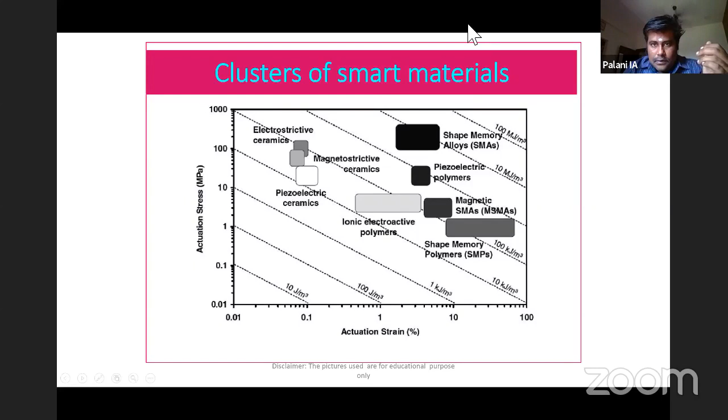If you try to look at the overall picture, one minute. Okay, I'm stopping my video so you can see my screen in a much better way. As far as these smart materials are concerned, these are the complete class of smart materials available.

As far as smart material selection is concerned, two major parameters we need to consider: one is actuation stress, another is actuation strain. These will be the main parameters helpful for deciding smart materials for applications—for example, like how you decide a motor for your application, either by torque or by speed. Similarly, with respect to stress or strain, you can select the type of material.

In the current context, I will be discussing shape memory alloys, SMAs, in detail. Let me go into a brief overview of how a shape memory alloy works.

You can see a video on my screen. In this video, you find a lotus flower kind of structure blossoming. It is blossoming because I am supplying hot air to it. When I supply hot air, it blossoms, and when I cut off the hot air, it automatically comes back.

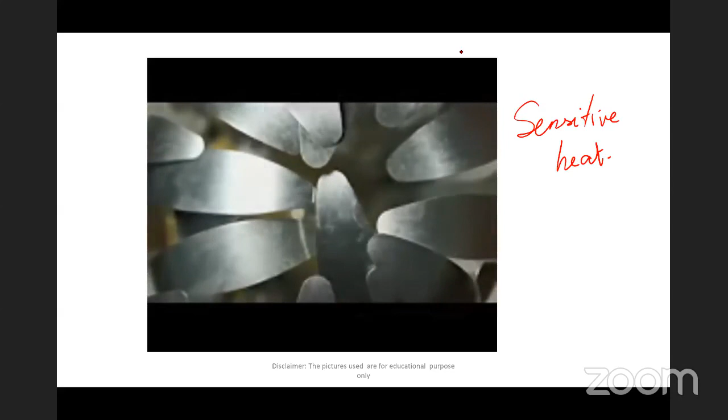So basically, this material is sensitive to heat. In the meantime, these materials have a capability to respond to heat, and they have a capability of biomimicking in nature. So that is one interesting aspect with this shape memory alloy. You can train this material for any kind of biomimicking capability.

As far as the history of the shape memory alloy is concerned, it is normally coined with the trade name Nitinol, that is Nickel Titanium Naval Ordnance Laboratory. That is why we call it Nitinol. Commercially, when you want to buy the shape memory alloys, it is already termed as Nitinol.

As far as the mechanism behind this memory is concerned, let us consider I have an ice. I'm just heating this ice, I get it in the form of liquid, and then further heating it, you get a gaseous phase. In other terms, this is something like a phase transformation. With respect to this phase transformation, you are achieving the SMA characteristics.

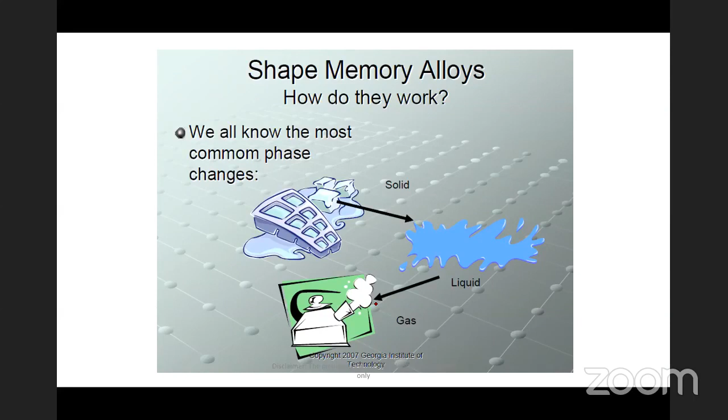Let me show you how a phase transformation happens in a shape memory alloy. As far as shape memory alloy is concerned, you have the austenite phase and you have the martensite phase. So it is something like switching between the austenite phase and the martensite phase. By heating it and appropriately loading it, you get certain amounts of variations coming out of it.

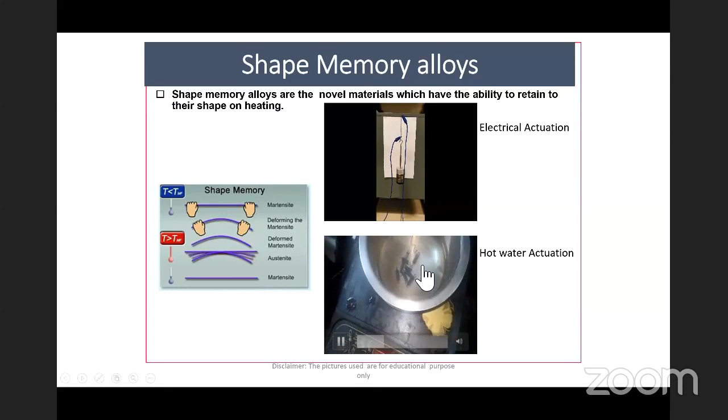Let me show you with a simple video. Here I have a shape memory alloy spring which is kept here. I am applying a load to it, and it is deforming. When I heat it, it comes back. Similarly, in the case of hot water based actuation, I have hot water here. I'm deforming the spring and putting it inside this hot water, and finally it crumbles up and forms a shape.

As far as the shape memory alloy is concerned, you have a martensite phase, and this is your deformed martensite. Now I heat it, it results in an austenite phase, and then it comes back to the martensite phase. So this is like a cycle: martensite to deformed martensite, then I heat it so it becomes the austenite phase, and from the austenite phase it comes back to the martensite phase.

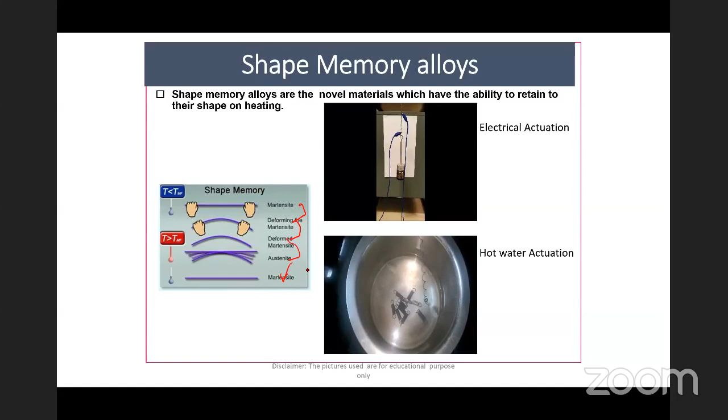Now let us go into some of its application perspectives, how these shape memory alloys are being employed. As far as shape memory alloy is concerned, what we do is train the system based on our requirement.

For example, here I have a wire which needs to be actuated like this, and when I put it in hot water, it should come to this shape. For this, I need to train it in a particular fixture, and I need to heat it in such a way that I am switching between the austenite and martensite phase, creating a cycle so that it continuously remembers its shape.

There are different kinds of materials which exhibit this shape memory alloy behavior, like NiTi, CuZnAl, CuAlNi, and there are some Fe-based SMAs which are also available which exhibit the shape memory effect.

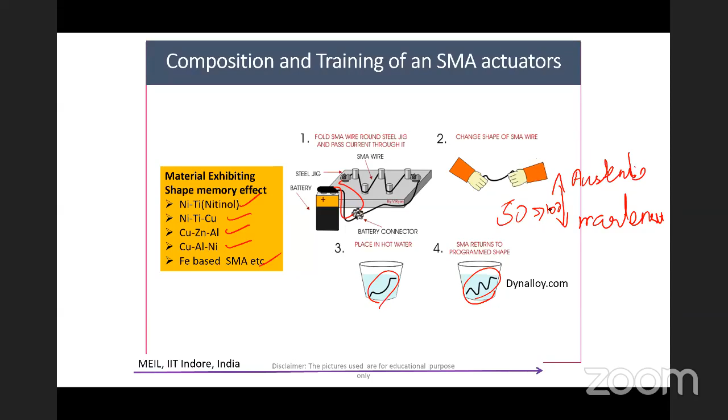Now, as far as the major challenge is concerned, for this training you need to have multiple cycles. In fact, to get such a structure, you need to train it for more than 50 to 100 times. That is, you need to heat it, then quench it in liquid nitrogen, then again heat it and quench it, and this you are supposed to do for more than 50 to 100 cycles. That is very difficult. In fact, it is time consuming as well as energy consuming.

If I try to look into the challenges in this particular field, these are some of the challenges I would like to put forward. One is tedious training, as we have seen that even for a minor change in the structure, you need to go for a tedious training.

Second is composition. Different materials exhibit different types of compositions, like NiTi, CuAl, CuAlNi, etc. By changing the composition, you can have tunability towards your functionality. That is one interesting aspect.

Third, if you see the video, there is an expansion of the spring, then again a contraction of the spring. When there is continuous expansion and contraction, there is a chance that some kind of oxide formation gets deposited on the surface. When this oxide formation gets deposited, it finally ends up in failure of the system. That is why we call it thermomechanical behavior.

In simple terms, if you are getting an LED bulb from a shop, you should be able to know the warranty and guarantee of it. Those are noted down by simulating it under a simulated condition, and from that we analyze it. Similarly, in the case of shape memory, we need a condition which shows what would be the life of this shape memory.

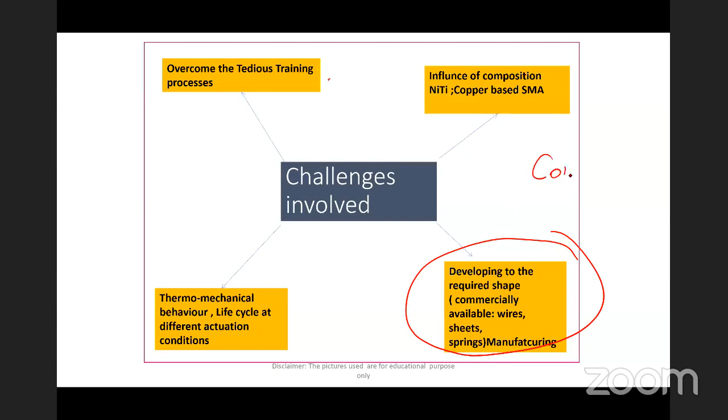Fourth important challenge: in most cases, commercially you get your shape memory alloy in the form of wire, spring, or sometimes sheets. It is very difficult to get it in a tailor-made structure. For example, if I want a tailor-made structure like this, it is not possible. This restricts things from a research or application perspective. So you need to make an arrangement such that you can make tailor-made structures. That is one of the major challenges.

These are the four challenges which we have addressed in our laboratory at different levels, which I will be explaining in my slides.

Let us start with this major challenge of making custom-made or tailor-made shape memory alloy structures. The first one I would like to talk about is something called BIMORPH, which is nothing but a thin film. We have developed thin film shape memory alloy structures, and we want to use that thin film shape memory alloy for different applications.

The motivation for us to start this work is something like a dragonfly structure you might have seen on some farms. In this dragonfly structure, the interesting thing is you have a thin polyamide sheet-like structure. This thin sheet actuates at very high frequency, initiating some kind of lifting force to the dragonfly. So if we need to design an artificial dragonfly, our major challenge is to develop such a wing-like structure.

We thought we want to develop a similar structure for some kind of micro robot. So the major challenge in this is we went for a concept called BIMORPH. BIMORPH is nothing but two layers - bi means two layers - so it's a composite layer.

For example, here I have two layers. One layer is a shape memory alloy, the other layer is a small elastic medium. So one way displacement happens because of the shape memory alloy, and the return stroke happens because of the elastic nature of it.

What I am doing is I have a polyimide sheet, and I give a strain to the polyimide sheet by applying a clamp to it. Then I go for deposition. When I deposit it, after deposition it gets a curved surface, and after heating it gets something like this.

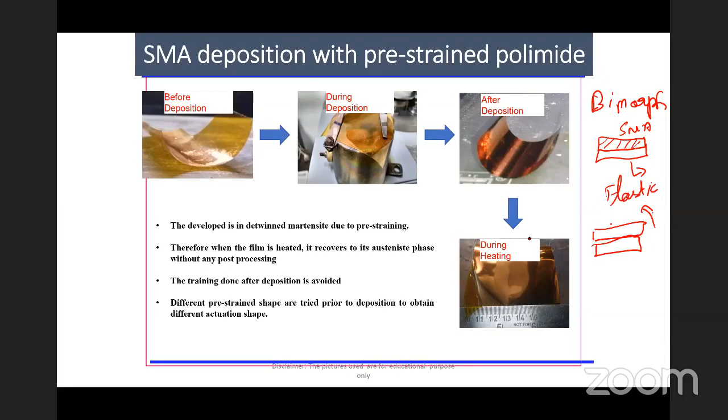The deposition method I use is a simple thermal evaporation unit. In this thermal evaporation, I have the material placed over here, kept on the boat. I am just heating this material so that there is vaporization, and here I am keeping the polyimide.

So in fact, I can just show you a small animation where you could see. So this is your SMA bimorph. As far as this SMA bimorph was there, this is on a heating phase, and when I try to remove it, it is on a cooling phase and it gets cooled. So that is the onward stroke that happens because of the stress which is being induced on the thin film, and it is happening because of the shape memory effect.

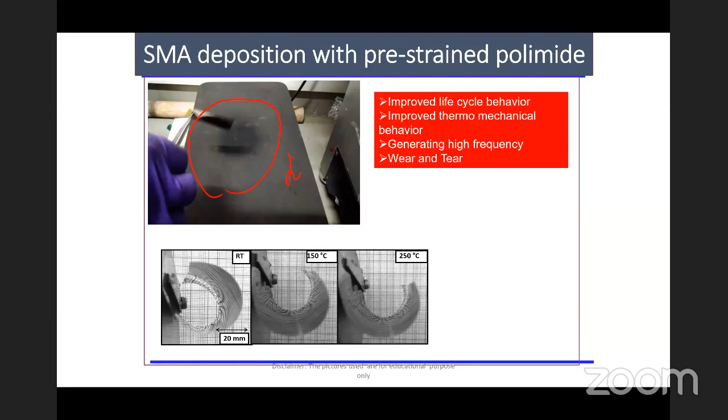And when you try to cool it, the return stroke happens because of the polyimide which is available. When you try to induce the stress on the polyimide, so that tries to come back. So this is how we have achieved the shape memory alloy bimorphs.

In fact, we have to do a certain amount of detailed research on it to improve its performance for different applications. Basically, we went for 3 different applications. 2 are relevant to energy and 1 is related to micro robots.

Okay, so as far as to investigate the energy, we were just looking into the substrate effects, the substrate thickness, and then the inclusion of intermetallics to improve its ductility. So this is some of the structural analysis which we have employed. This is a simple SEM micrograph which shows that the samples are plain.

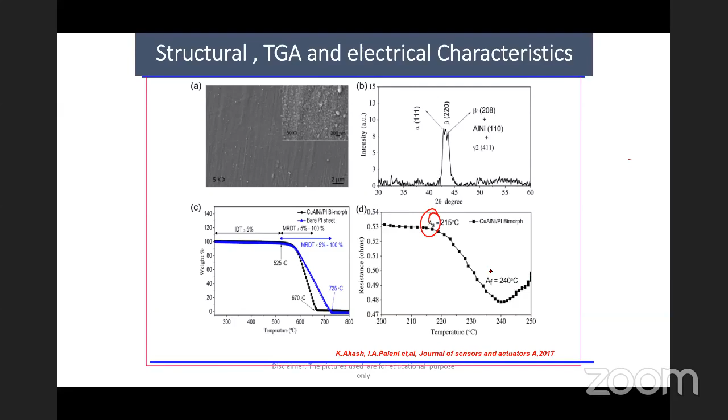In fact, we did an XRD analysis to study the particulates which are available, and we also did a small DSC and TG analysis to study the austenite and the martensite behavior of the material.

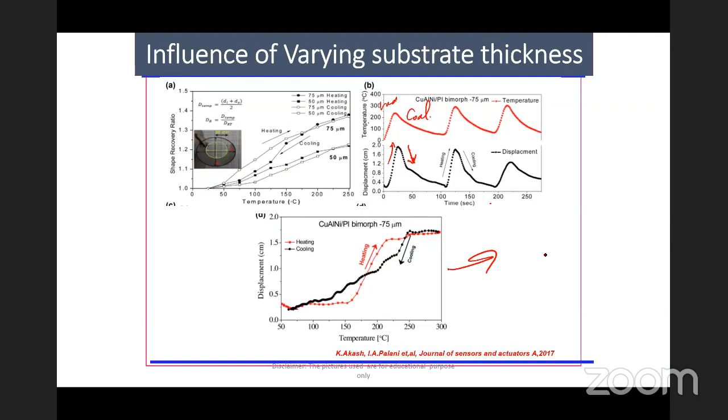So we have plotted with respect to temperature, time, and with respect to displacement and time. As far as temperature-time is concerned, this is your heating cycle and this is your cooling cycle. During your heating cycle, you get a higher displacement, and if I want to have control over your displacement, I can just cool it. And this is your hysteresis plot, which confirms the SMA for an actuator.

Okay, so in fact we did a detailed life cycle analysis. In this life cycle analysis, we went for a continuous displacement. So by changing the continuous displacement and by going for alternate heating and cooling, we can go for a higher life cycle.

In fact, our life cycle was basically relying on the substrate thickness. So we went for different substrate thicknesses, and we found that 75 micrometer polyimide will be highly helpful for us to go for more life.

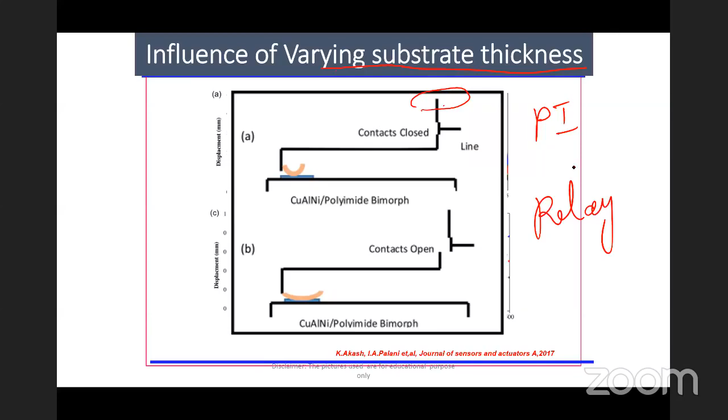Okay, so we went for some kind of contact arrangement, so that whenever you try to actuate it, the contact is closed. When you try to open it, the contact is open. So basically, we were looking for some kind of relay arrangement, a micro relay arrangement for this system.

Okay, next we also studied the influence of growth temperature. Basically, because you have a substrate, this substrate plays a major role. Like for example, in the case of thermal evaporation, this is your substrate.

This substrate which is being placed is nothing but a polyimide, and here I have a boat through which the particle is being evaporated, where you have an SMA which is being placed over here. So what happens is I'm just heating this substrate. When I heat this substrate, there is some kind of microgranule formation that will happen. This microgranule formation will enhance my wettability for depositing the SMA. Okay, so this concept is called the VLS mechanism.

That is nothing but vapor, liquid, solid mechanism - I am just heating the substrate and improving the wettability of the system. We did a thorough DSC analysis to investigate the austenite and martensite behavior, because this is going to govern the actuation characteristics and its applicability of the shape memory alloy for different applications.

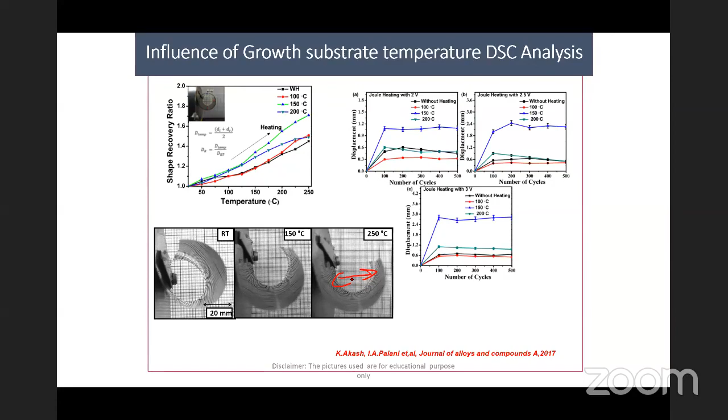We looked into the recovery ratio - how much is the recovery ratio, or how much is the curling characteristics being applied, how these curling characteristics are being employed. We went on continuous heating of the system to see up to how much life cycle the shape recovery was happening. So these are some of the life cycle behavior.

We included some of the intermetallics in it, such as Mn, etc. These intermetallics are highly helpful to improve the life cycle behavior throughout the system.

As I said earlier, this work we have used for some kind of micro robotic application. As far as this micro robotic application is concerned, one major aspect is, for example, if I want to design a dragonfly with a shape memory alloy bimorph, two major parameters which I need to consider: one is my frequency,

and the other one is my displacement. So in a localized displacement, if I have a tunability towards change in frequency, that would be helpful for me to proceed further or to use it for some kind of micro robotic application. The major thing is, whatever material we have developed should actuate at the frequency we require. In fact, it actuated, so that is the reason we went for different intermetallic compounds.

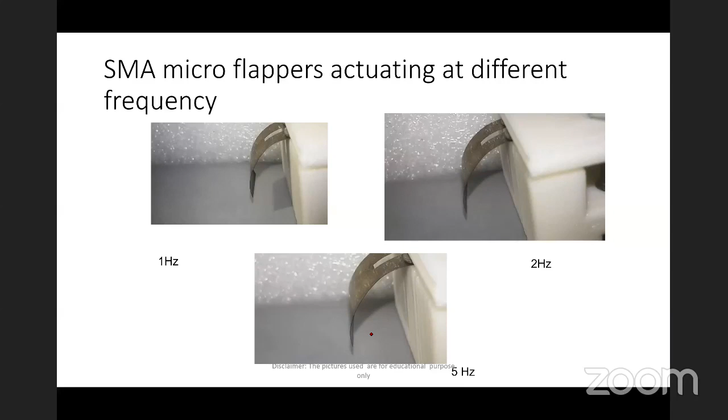Now let us go to the next one. The next application we were working on with the shape memory alloy bimorph is for transformer oil contamination detection. As far as the transformer is concerned, we all know transformer blast is one of the major issues, because you have a coil placed inside the transformer. By alternative heating and cooling of the transformer, the oil gets contaminated. When the oil gets contaminated, there is a chance that the coil heats up the oil in a much higher way, which may result in explosion.

The idea behind this is, since we have a material which is sensitive to heat, we have a bimorph. We want to put this bimorph in the transformer oil, and employ a laser displacement sensor, which is connected to an IoT module. Whenever there is a change in contamination, there is going to be a change in the influence of temperature. When there is a change in the influence of temperature, it will end up in some kind of variation, and that variation is continuously monitored using this laser displacement sensor.

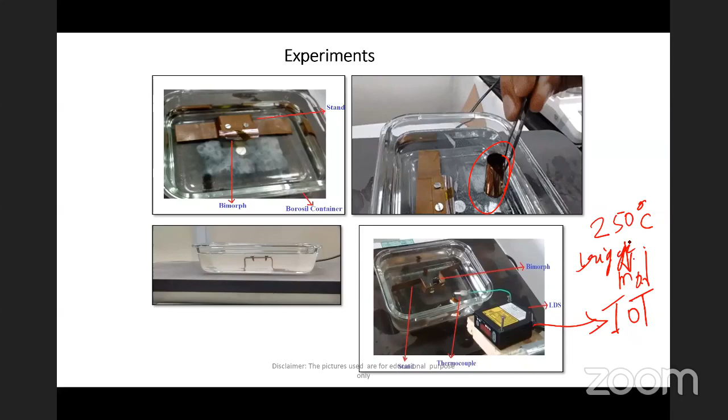When this laser displacement sensor gets actuated, we can set a limit - for example, if the temperature goes beyond 250 degrees Celsius, this IoT module will get triggered. When this IoT module gets triggered, a message can be sent to the concerned lineman, so that he can immediately look into it. We have given this to Central Power Research Institute for some technology transfer analysis. So this is how an LDS works on the system.

The next case study relevant to shape memory alloy bimorph, which I am going to discuss, is something related to a system called Johnson's heat engine. Most of you might be aware of this concept called perpetual motion. This perpetual motion is nothing but getting a continuous displacement without much effort.

So in fact, it is against the second law of thermodynamics, but still it has its own energy conservation. So the interesting part is this SMA can be used for developing such kind of perpetual motion.

Like in this case, you have a Johnson's heat engine which is available. Here you have a cold junction and here you have a hot junction. What happens is, here you have a shape memory alloy available. Because of this variation in hot and cold junction, there is a shift in the center of gravity of the wheel, which results in kind of rotation to it. In fact, if you see this video...

If you see in this video, you have a rim where shape memory alloy springs are being placed. This is hot water. Because of the change in the center of gravity, there is going to be a rotation.

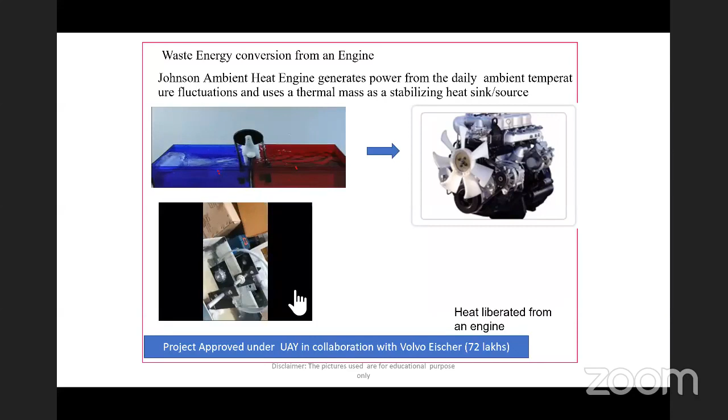So like places like Rajasthan, etc., which are high humid, you can use this as an energy harvesting unit. The only thing is, you have a shape memory alloy rim kind of arrangement, which we are going to put near an overhead tank. When it gets heated up, obviously it will rotate, and from that you can harvest the energy.

So with this as an idea, we were working with a company called Volvo, which basically deals with trucks. So in their arrangement, we wanted to go for energy harvesting application.

As we all know, when we switch on any automobile system, either car or truck, at the bonnet you can reach a temperature of around 80 to 150 degrees Celsius easily. Whereas at the exhaust, your temperature ranges around 250 to 450 degrees Celsius.

So the idea is, if we can fabricate this shape memory alloy bimorph, since already we have a bimorph, in the form of a belt, we can put this bimorph in between, either at the exhaust or at the front of the bonnet.

So as far as the range of 80 to 150 degrees Celsius, I can go for nickel titanium based shape memory alloys. And in the case of CuAl combinations, I can go from 250 to 350 degrees Celsius. So this can be used at the exhaust, and this at the bonnet, so that you can harvest the energy and continuously tap it.

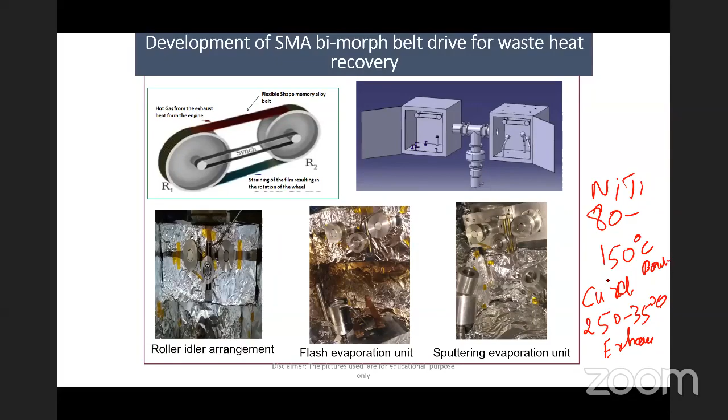In fact, we made an arrangement in such a way that we were trying to tap the heat coming out from the exhaust, which I will show you in one of the videos. So the next case study we are going to talk about is something related to the usage of shape memory alloy structures for some kind of additive manufacturing system.

So, till there, any doubts or questions from your end? Yes. Any questions or any doubts? Hello? Hello? Sir, I am getting some kind of noise. Hello?

Okay, so let us go to the next case study, which is related to NiTi shape memory alloy structures using laser additive manufacturing. As far as this case is concerned, we all know about this concept called Industry 4.0, where machine-to-machine communication is called Industry 4.0.

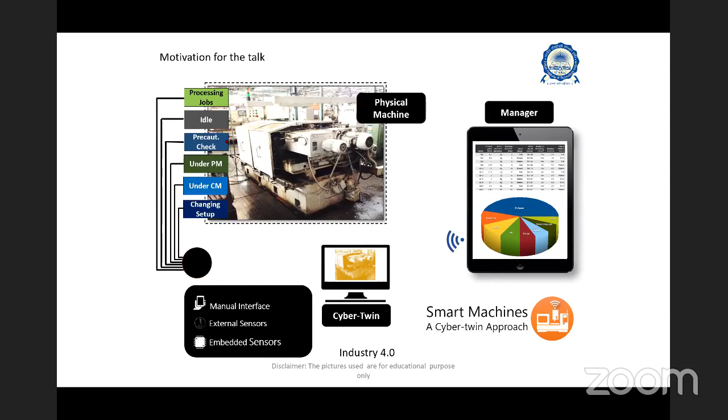As far as this case is concerned, we have proposed an idea. We have a pretty old lathe, and we want to make it intelligent so that it can easily communicate with the internet. So what I am doing is, this is the spindle, and this is a system which is available.

If you try to put a tool in this, the tool will be continuously wobbling. For example, in any machine tool, before it fails, when the tool pushes forward in the stroke, before failure there is going to be wobbling, and that wobbling will end up generating a certain amount of heat. Because of the heat, there is going to be a failure.

So basically, whenever there is vibration, vibration leads to heat, and heat leads to repair. So now, since our material is heat sensitive, the idea behind this is, I have a spindle.

Over the spindle, if I could develop a shape memory alloy ring, so that I could deposit a shape memory alloy ring, because of the vibration which is happening, there will be a huge amount of heat generated, and that heat will give a certain response to the shape memory structure so that it will try to tightly hold it, arresting the vibration in the meantime.

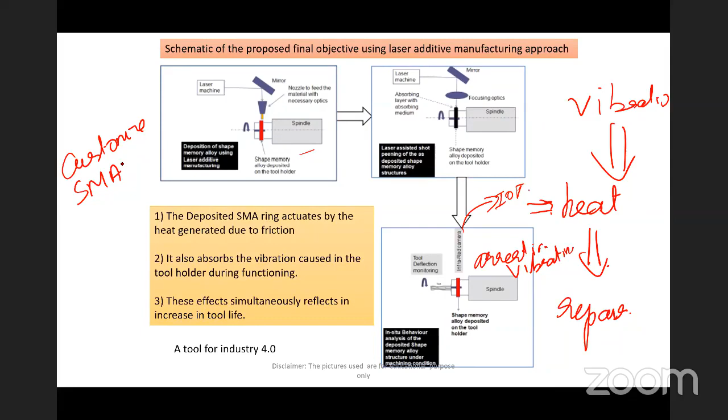We all know about this current 3D printing technology. In current 3D printing technology, you are just melting the material and then manipulating it in such a way that you can get the required arrangement. For our application, what we are going for is laser additive manufacturing of shape memory alloy structures, where we are using a laser source.

This is an arrangement we have made, and this is the powder. In our case, we are going for nickel titanium. So this would be my nickel and this would be my titanium, where I'm feeding the powder through this nozzle. When I am feeding the powder through this nozzle, the powder gets fused, it gets heated up, and finally it ends up in some kind of manipulation.

So this is the overall system. Basically, this we did in collaboration with RRCAT, a Department of Atomic Energy unit, where we used a 2 kilowatt fiber laser system. In this system, we had a coaxial feeder which is available.

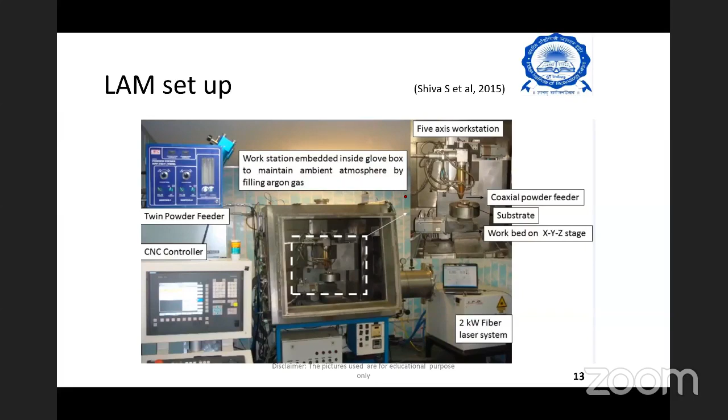Through this coaxial feeder, we were feeding the SMA structure into it, that is, the SMA powder. Through this SMA powder, there was a continuous feed, and then we fused these powders and manipulated using this axis. Basically, I can just show you.

This is the kind of SMA ring which we have manufactured. These SMA rings can be easily fit into your quill or into your material, so that whenever there is going to be some kind of vibration, this will try to arrest the vibration, and in the meantime it will actuate and try to pull it up.

We went for different analyses. Basically, we went for laser additive manufacturing, a fused deposition based technique for making these SMA wires and structures. But the major challenge in this is obviously that you are heating the material and then quenching it. When you are heating and quenching, it may end up in certain amount of melting, and finally it may end up in a porous structure.

In fact, these are some of the porous structures which are available. But the good part with this system is you have a configuration to investigate the influence of change in composition.

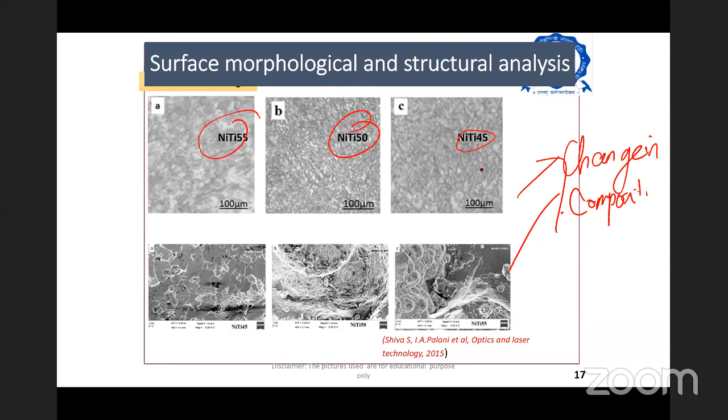The most important thing is we were concerned about the material behavior, basically the structural characteristics of it, because structural characteristics will give me an indication at which point exactly my SMA effect happens. Basically, this is the B2 phase. This B2 phase will be helpful for me to investigate how the SMA effect happens.

So I could observe a B2 phase with this additive manufactured shape memory alloy structures, which would be helpful for me to proceed further. We compared the results with the conventionally available NiTi shape memory structures, which is available in the market.

As far as this fabrication is concerned, where we could observe is the DSC effect. What we could observe is somewhat matching with the conventionally available system, and almost whatever B2 phase which is available with the conventional system, the same B2 phase we could achieve. This is an interesting aspect with respect to laser additive manufacturing.

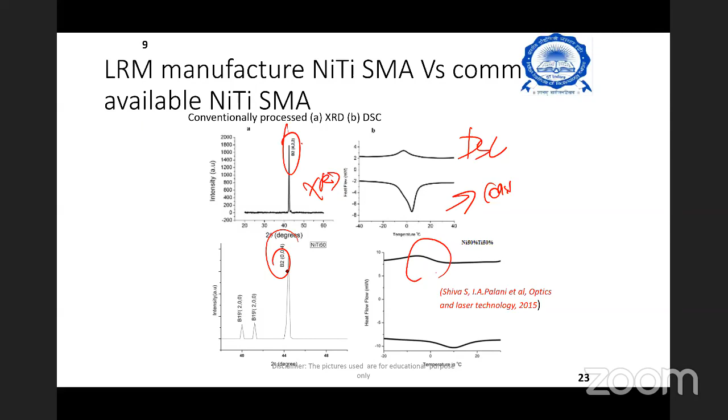But the major challenge in this is, as I have reported, there was some kind of porous structures which were available. So in order to avoid these porous structures, we were using some kind of post treatment. Since we are using a laser, we wanted to use the same laser for some kind of post treatment. One post treatment we did is laser shock peening, and another one is laser annealing.

Laser shock peening is basically used to induce a compressive residual stress. The other one is laser annealing, where I'm recrystallizing the structure to maintain the uniformity throughout the system. Those two things I have employed, and it was working fine.

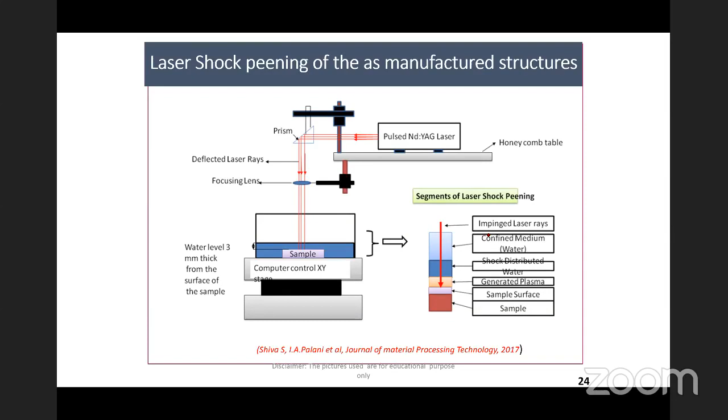These are some of the overall setups which we have employed for it. As far as laser shock peening is concerned, we just focus the beam along the area and we create a shock wave. By inducing this shock wave, we can induce a residual stress on the surface, and this is how we did the laser annealing.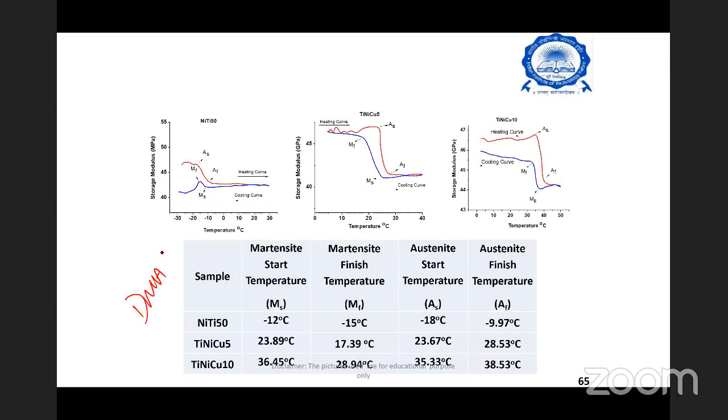The next one which I would like to talk about is a slight extension of this, which I call smart grippers.

But with my earlier case, I had some issues, because it was good for basically since I had used a laser-based system. So it was good for some kind of pseudo-elastic behavior capability, whereas for a proper shape memory alloy behavior, I did try different compositions, but it's better to stick to a particular composition to get the actuation effect.

So what we did is, this is a system which we made in our laboratory. This is a wire arc based additive manufacturing system, developed in-house. This system was completely built in our lab at a cost of 2.5 lakhs, where we used a MIG gun and a programmable controller with that.

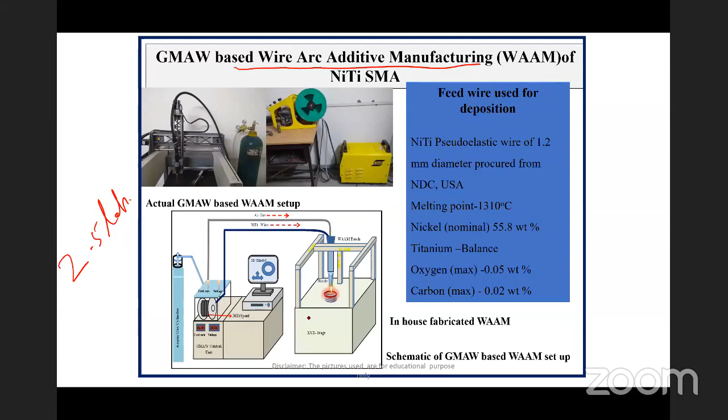The major advantage here is I was feeding shape memory alloy wire directly inside it. So you have a rolled shape memory alloy wire, and using this rolled wire, we were feeding it inside the system, melting it, and trying to manipulate it.

The good part with this is each and every layer is controlled. Most important, we are even exploring an option where your substrate gets heated up, and with respect to your substrate effect, you can study how your actuation characteristics change.

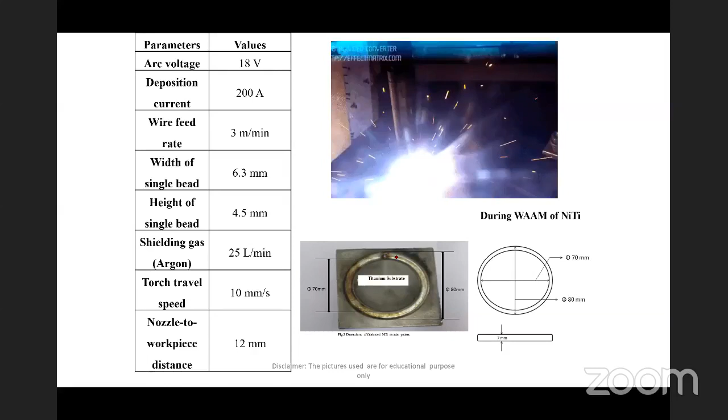So this is the structure which we fabricated with shape memory alloy, an as-fabricated structure using the WAAM technique. From that, we went for a wire EDM cut, and finally we made a pseudo-elastic NiTi.

We went for a training process. We annealed it to 450 degrees Celsius for 1 hour, and then applied a training system. We had a fixture, since I wanted a spline kind of arrangement, something like this. So I trained the system with respect to a spline, and then we were switching between the austenite phase and the martensite phase.

So we had a hot plate, and over the hot plate we kept a graph sheet so you could see the recovery which is happening. Almost we could achieve around 80% recovery, which was equivalent to a commercially available system.

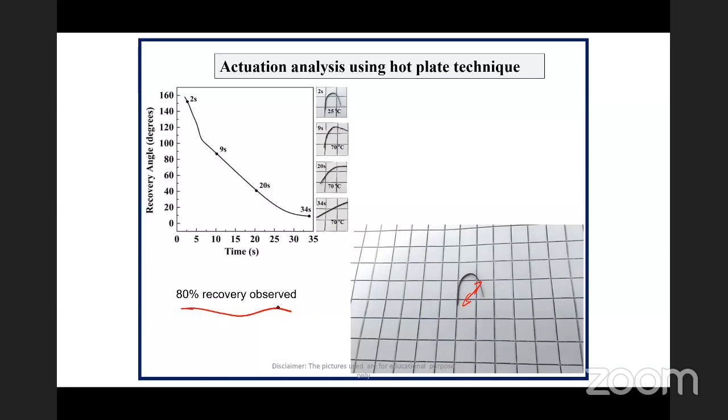The interesting aspect of this is whatever shape you require for shape memory alloys for your applications, we can fabricate using this, whether it's on a thin film base or on a bulk base. You can just do it using this. That's an interesting aspect of this technology.

So the next case study, or the next challenge we are going to talk about, is predicting the life cycle and the thermomechanical behavior of shape memory alloys. As far as this case is concerned, I have a spring that I'm actuating, it expands, and then it contracts.

When it is expanding and contracting, there is a chance that this may pull up some kind of oxide formation in it. When it tries to pull some oxide formation, finally these oxides will start encapsulating it through your springs.

So when this oxide starts encapsulating it within your spring, there will be an opening and closing, so it will end up in some kind of failure. In simple terms, it is similar to corrosion behavior. So I have a material where I am heating and cooling it, giving a pulsating behavior to it. At one particular time, there will be a huge amount of oxide entrapment. Same thing happens with shape memory alloy.

Even though it has a nickel titanium component, we thought we need to have a test bench. This test bench should be capable enough to capture the life cycle of the shape memory alloy. For example, I am manufacturing a strip and I want to study the life cycle behavior, basically to know the failure analysis of those structures.

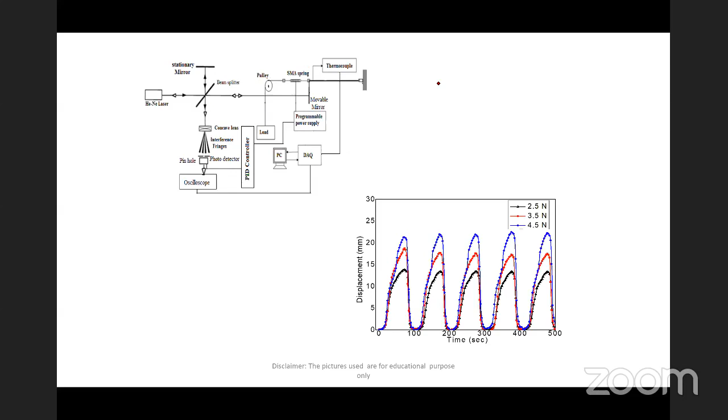So what we did is we made our own setup. As far as SMA actuation is concerned, I categorize it into 3 characteristics: one is with electrical,

another one is with hot water, and the other one is with laser. All 3 will give heat to it, and the system is responsive to heat. As far as electrical is concerned, we use electrical biasing because of H equals I squared R, you are getting an actuation. Second is with respect to hot water actuation.

As far as hot water actuation is concerned, you are just dipping it inside the hot water, and there is going to be some kind of actuation characteristics which will end up in some kind of rotation.

And the third is with laser, which is quite interesting. As far as laser is concerned, it is non-contact and it can give heat. Suppose I'm thinking of this gripper inside some environment where it is very difficult for me to put an electrical switch, suppose putting this gripper inside a thermal reactor or a nuclear reactor. It is very difficult to put up electrical pulsating to it inside the chamber. In those conditions, I can employ a laser so that it can hit the surface and actuate it, helping me open and close the system.

Let us first talk about this electrical actuation. We made a small test bench. Here, this is our SMA spring, which is connected to a pulley overload, and this is a movable mirror. This SMA spring is connected to a programmable power supply, and it is fed into a PID controller.

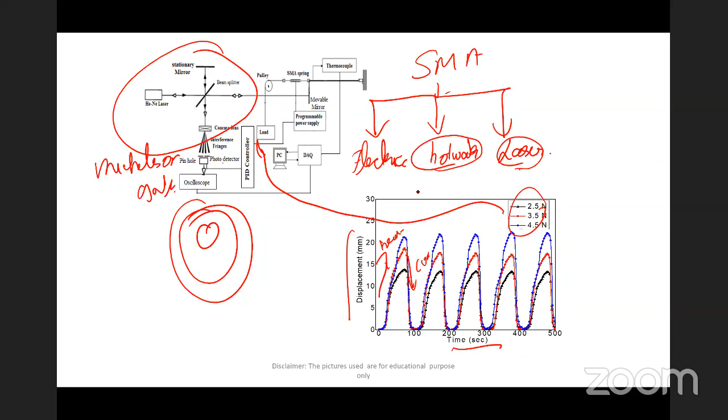The next one I had talked about is something related to laser actuation. As far as laser actuation is concerned, you have an SMA spring, and one interesting aspect with this laser actuation is that it involves contactless energy transfer, meaning there will not be any contact of energy into it.

Like in the case of hot water or electrical actuation, you will be having a contact which is being placed, so maintaining the contact throughout itself is a challenging task. Whereas in this case, it's a non-contact base.

We are just using a laser which is being fed into it, or the other option would be hot water. So what we did is we used a 50-watt fiber laser, which was made to scan along the spring, and this is your load which is being placed over here, and this is your laser displacement sensor, which is fed to a DAQ, and you are continuously going to monitor it.

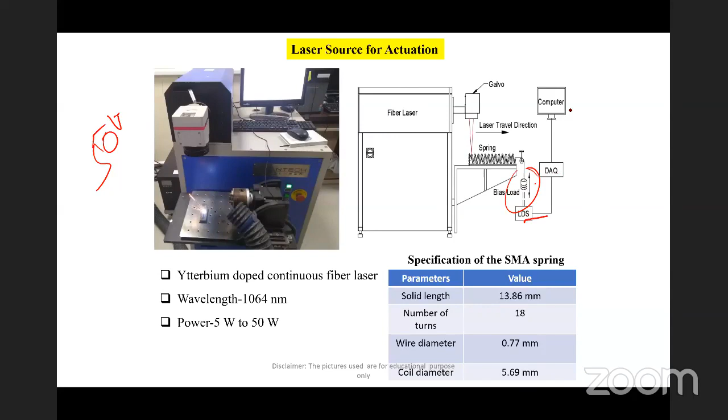So it would be something like this. This is your laser which is scanning on the spring, and we were just trying to monitor the temperature. So the interesting part is we were trying to look into its behavior throughout.

I will just show you a small video of how laser-based actuation and its life cycle behavior has been analyzed. This is the load which you have used for it. Here what we are using is we were just putting up an LDS sensor over here, which was used for continuously monitoring it, and here you have a laser which is being placed over here.

So this laser was made to heat, and then there is a lifting up and lifting down in the system. The lifting was in a few hundred grams and 150 grams, so that this lifting was alternative, and with this alternating lifting we could achieve the life cycle throughout.

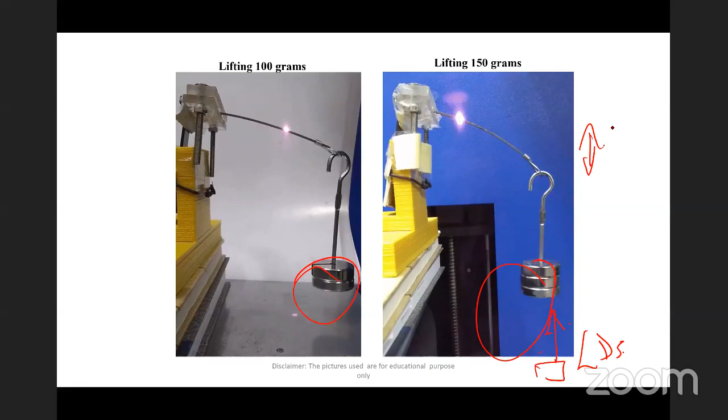So this was the actuation behavior with different life cycles. Basically, with different power of the laser, we were trying to work on the behavior, like with 15 watt, with 20 watt, with 45 watt, and we were trying to study its life cycle throughout.

One important thing we did is we were trying to look into the heating and cooling cycle characteristics, because as far as laser is concerned, you can just have control over the pulse width. So what we did is we went for a pulse width behavior, and by changing the pulse width behavior we were trying to study the aspect of it, so that you can go for a higher aspect ratio as well as a higher control over the thickness.

So that was an interesting aspect with respect to these shape memory alloy structures. The next one we are going to talk about is the different various laser actuation behavior and its life cycle analysis in detail.

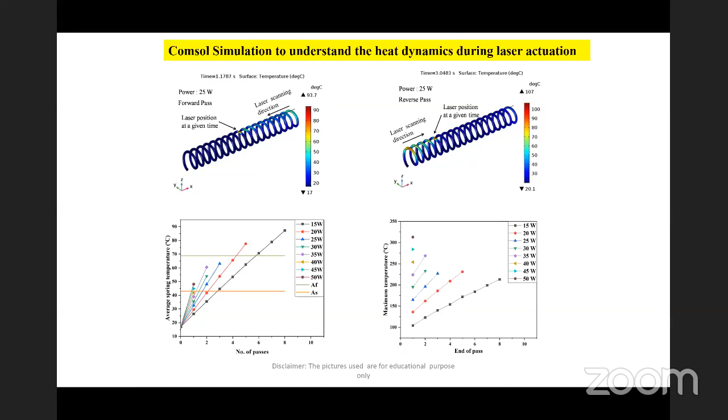So this was a hot water actuation characteristics where you had a heating cycle and a cooling cycle. In this heating cycle, you are just heating it. So this was the pulse which we employed, and continuously we were monitoring it by just cutting off the heat and seeing how the actuation happens.

But the major aspect with this is, if you try to look into it, there was a huge time delay lag because you are dealing with convection of water, so because of that there was a huge time delay lag. But still, it has its own application towards something like Johnson's heat engine, or to predict the Johnson's heat engine behavior.

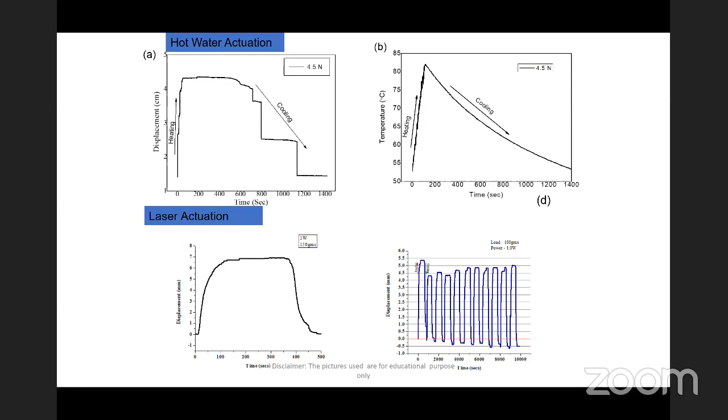So the next challenge with respect to shape memory alloy is welding of shape memory alloy, because we have seen in our earlier case also that we were just heating up the material. When we try to heat up the material, it ends up in some kind of porous structure.

There is going to be a change in the thermomechanical capability, and because of that change, there's going to be some kind of effect. With a conventional welding unit, you can weld a shape memory alloy, but retaining its property is a challenging task.

That was the major challenge with us. In fact, that was one of our projects which we had with GE. We had some kind of aerofoil available, and if you could weld this aerofoil properly, by continuously actuating it you can control or minimize the energy consumption on the aerofoil, and have flappers capable of moving in a particular direction.

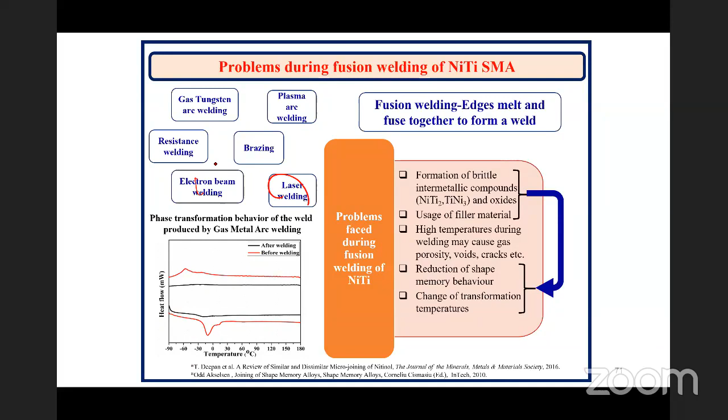So there are different types of welding aspects available which have already been reported, such as laser welding, electron beam welding, etc. But in all these cases, transformation characteristics were studied, yet nowhere could we see a visible actuation coming out of it, which was our major challenge.

So what we did is we went for a friction stir welding capability. As far as friction stir welding is concerned, you have a thin sheet and a tool which is placed over it. This tool is inserted in a particular orientation such that you continuously weld it, and finally you end up with a proper joining.

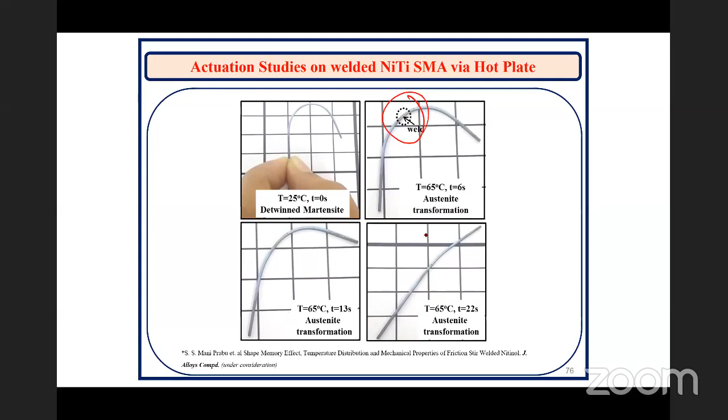The major challenge here is we would like to see how the SMA effect behaves with respect to it. So we went for a DSC analysis to study where the austenite phase and the martensite phase are available. This is a close-up structure where exactly your weld bead is available, and we want to study the austenite transformation and the detwinned martensite transformation in detail.

I'll just show a small video. So this is your hot plate. Over this hot plate, I'm putting up the material and heating it, and here exactly your weld bead formation is available. You could see the weld bead formation, and without any issues we could get a proper actuation and a proper strain recovery coming out of it.

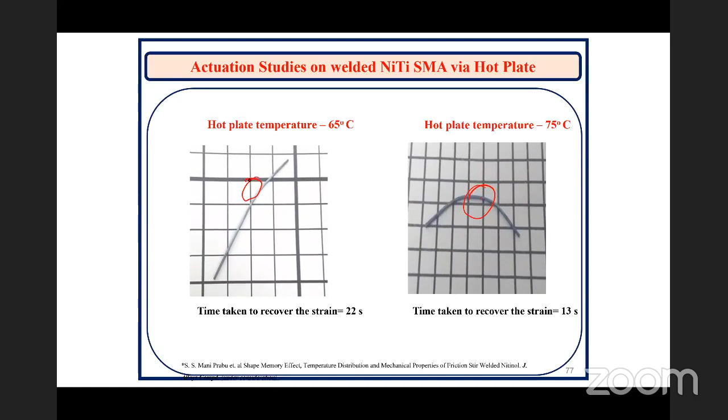That was one interesting aspect about this actuation study. In fact, we are now planning to go for a technology transfer with them, so you can minimize the load on the engine by having such dynamic structures. This kind of dynamic structure is capable enough to underload your engine capability, and you can have a dynamic aerofoil to have control over the direction.

Here you see a kind of life cycle behavior available, where there is alternative heating and cooling, and a martensite and austenite phase which is available, and this martensite and austenite phase is capable enough to study the characteristics too. So these are some of the challenges which we have addressed overall.

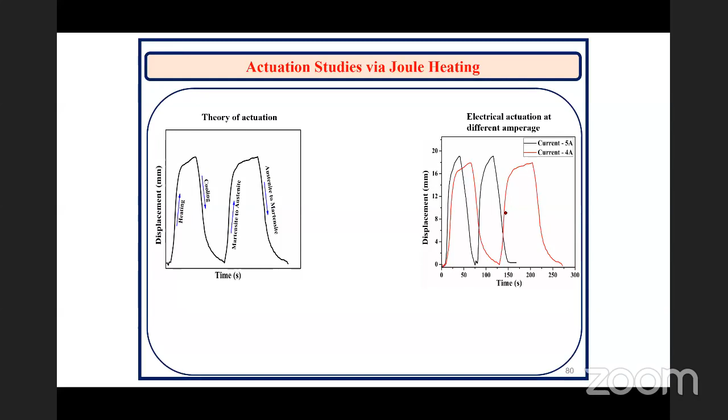If you try to look into a world perspective, some of the challenges of shape memory alloys were there, which you have addressed. Let me just quickly go through some of the devices we have fabricated with respect to shape memory alloys, because now we have a capability to make tailor-made shape memory alloy structures. That is one interesting aspect.

As far as these tailor-made shape memory alloy structures are concerned, you now have the freedom to work on different domains. One is this Stewart platform, a kind of parallel manipulator. Using shape memory alloys, we are trying to develop soft robotic structures for different applications, which I will show you. This parallel manipulator is mainly meant for orienting a beam or moving it in a particular direction. I can keep a mirror or a prism on it, so that when you push into it, the prism or mirror can be moved in a particular direction so that it orients and finally hits the particular layer. That is one aspect with this structure.

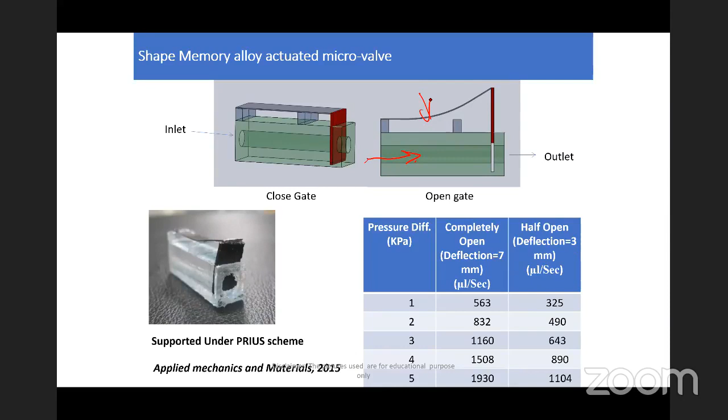Second thing is we have also developed some kind of micro valves. We have used this in micro mixer applications, like in the pharmaceutical industry, where I want to mix a drug that is available. A drug is pumped in a particular direction, and there is a valve kind of arrangement through which the drug is fed. The opening and closing of this valve is taken care of with the laser. You can put these mixers inside some kind of chambers, and the control over the system is such that by just cutting off the laser, you can open and close the valve, giving you micro mixing capability so you can mix the component and pump it out.

Third one, this is a small DCV valve we have developed - a directional flow control valve. In this, we have used an SMA spring along with an energized spring, and we heat it with a laser. When we heat it with the laser, you can have control over the flow rate. Initially the flow will be from A to B; when I cut off the heat, it may go from A to C. These kinds of flow control valves have also been developed, for one of the nuclear industry applications.

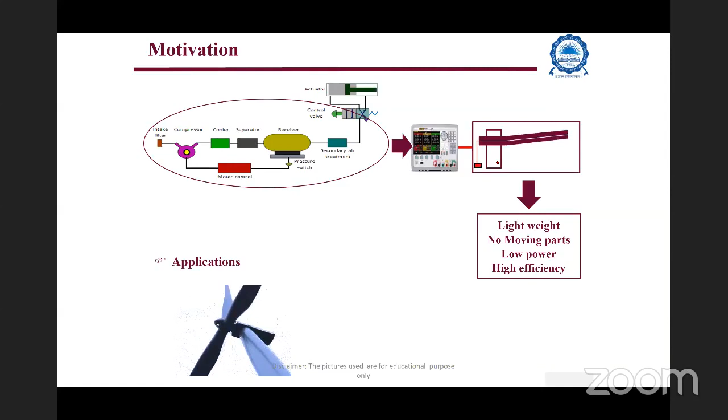Next, one of the important case studies we developed is for developing an aerodynamic structure, like a missile. In a missile, to orient its movement, it is normally embedded with composite structures, like GFRP composite or fiber reinforced composites. Our idea is to make this composite structure intelligent by embedding shape memory alloy wire inside it, fed into the composite structure. By actuating this shape memory alloy, you get intelligent structures capable of intelligent actuation and control over the flow. I'll show you how we fabricated it.

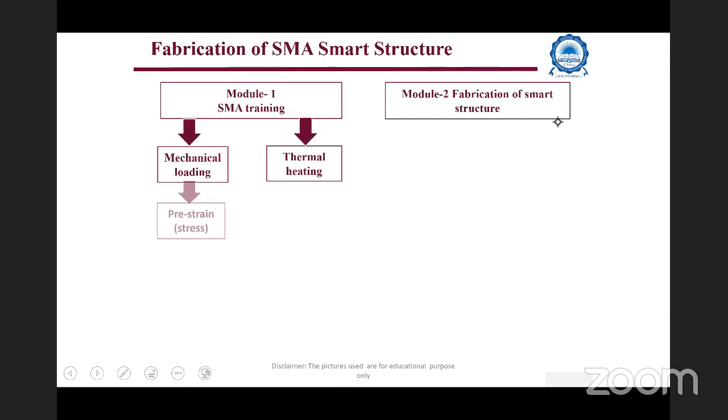These are some of the methodologies we employed for fabricating this. One is training of the shape memory alloy, and the second is developing a composite structure on it. For training, we had a shape memory alloy and tried to change its shape. We used a fixture arrangement, put it inside the furnace, and went for alternative quenching.

When we went for an alternative quenching, it was highly helpful for us to create some kind of, based on your required geometry or required reach, a programmable material. That is an interesting aspect with this.

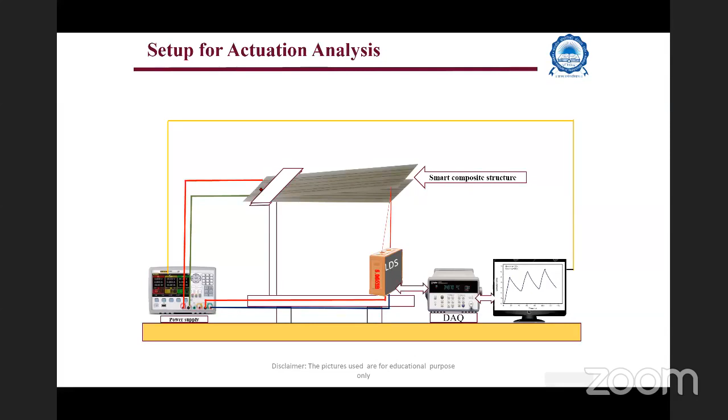This was the setup we employed for controlling this composite structure in a much better way. These were the different structures we employed, where you have a fiber, a resin, and an SMA being employed. Inside this, we had an SMA wire and a tension arrangement placed inside this tension group.

So here you have an SMA wire being fed into it, using an overlay method. We used an arrangement of winding it up with a strip, and then went for a hand layup method so that we could fabricate this composite structure.

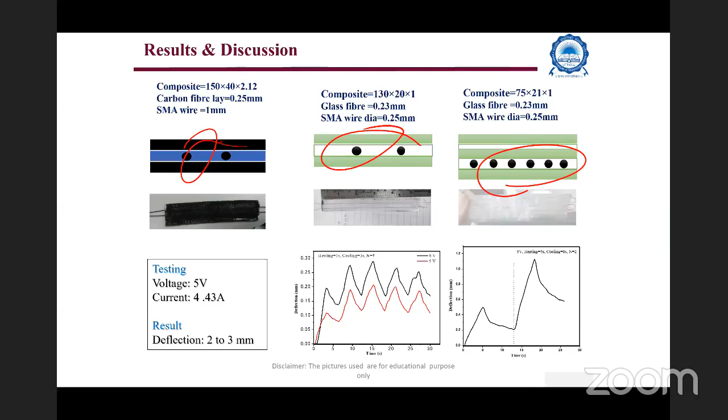In fact, we went for different configurations. We went for GFRP and fiber reinforced composites also, and tried different orientations, something like this. By changing this orientation, you can have control over the reach. That was interesting. One of the reach, I will show it to you.

To get this kind of arrangement, I went for a coil arrangement, something like this. In this, we programmed each and every layer. When we program each layer, you can get an appropriate actuation. Similarly in this case, you just apply heat, and by inducing the heat, you get a complete life cycle behavior coming into the picture.

This was a kind of theta angle which we wanted to get, and which we are getting over here. By changing the different configuration of the shape memory alloy composite, you can go for any kind of theta orientation coming out of it.

In fact, we have a capability to look into its life cycle behavior. We went for a different life cycle analysis since it is used for an aerodynamic structure.

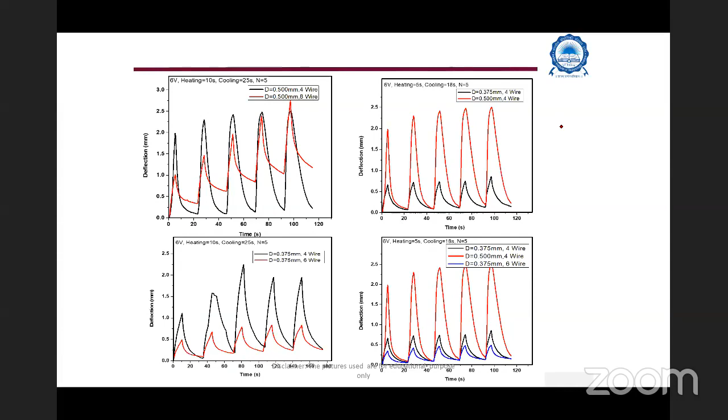What we did is we went for an arrangement where we kept it inside an igloo box kind of arrangement, where we were continuously feeding low temperature liquid nitrogen inside it, and using this liquid nitrogen we were heating it up, and then there was an actuation happening. This was done at a low temperature environment. We studied the life cycle behavior.

As I mentioned earlier, for the last three years we have been more focused on soft robotic systems. A soft robotic system is nothing but, for example, your finger or your hand. Since shape memory alloy has a capability of biomimicking, we want to mimic a physical structure for its application.

First, I would like to talk about an underwater robot which we have developed, where we had a fish kind of arrangement available. In this fish, earlier cases used motors, but the major problem with the motor is it creates noise. Most importantly, when the motor creates noise, it creates some kind of turbulence, so your controller has to give extra force or extra care whenever there is a buoyancy shift happening.

So what we did is use shape memory actuators, which are bit silent actuators. Instead of this fish bone, we wanted to convert it into a shape memory alloy structure. This is the structure we made, and we have kept a shape memory alloy arrangement over here.

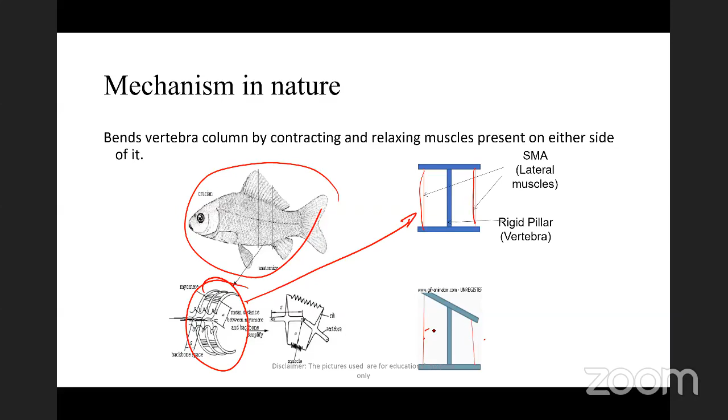By actuating it alternatively, you can have a forward stroke or a return stroke coming out of it. In fact, this was the complete skeletal structure of our robot, what we have developed.

So these are some of the different configurations of fishbone arrangement what we have made in this. Here you have a shape memory alloy which is being arranged over here, and this is your fishbone arrangement. And these are some of the training characteristics.

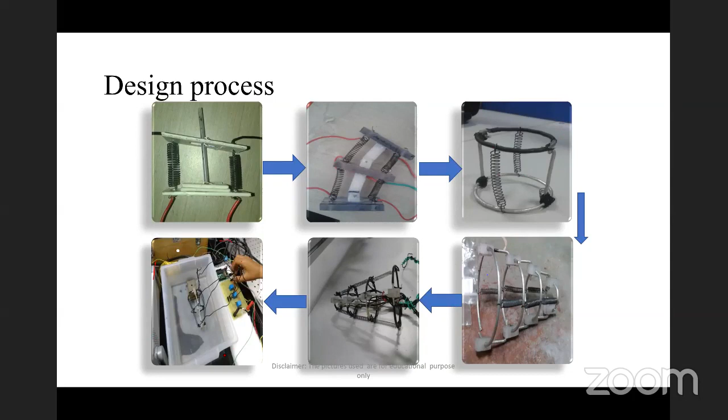In an underwater tank, we were trying to look into the training capability. And this was an H-bridge relay arrangement which we employed. By alternatively applying the H-bridge voltage, you can have a control over the spring. The more you have the spring...

So we were trying to connect our relay arrangement in such a way that by just giving the relay arrangement, we can have a forward stroke coming out of it. And in fact, this was the skin arrangement which we made.

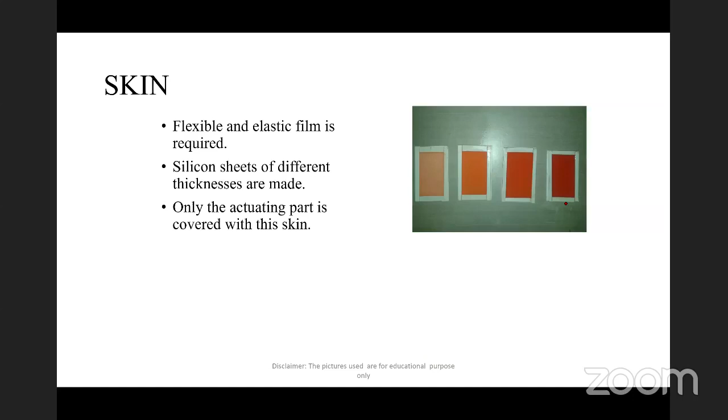So this was a kind of a silicon rubber. This silicon rubber was well cured using a UV treatment, so that you can wrap it along the sides of the fish, and then you can create a buoyancy.

In fact, we did this in an environment at a small level for our test purpose, but the overall scheme which we have transferred to a CSIR lab to study, to investigate the buoyancy effect, to investigate along the depth. So the next one which we have developed in our lab is a small jellyfish kind of arrangement.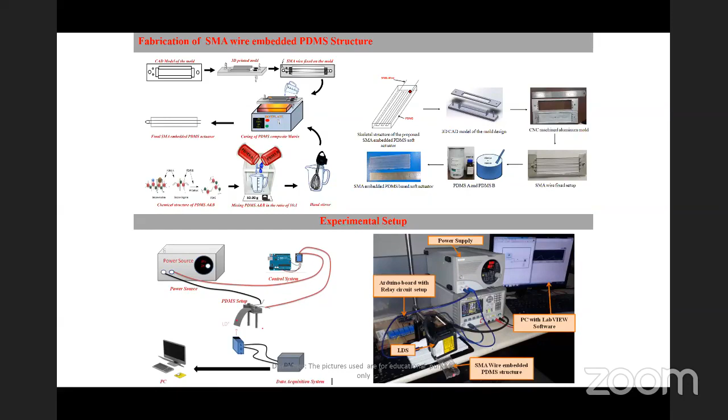In this jellyfish, what we have made is a simple fin kind of arrangement, which is embedded with PDMS and SMA wire inside it. These are completely programmed in such a way that when you try to actuate it, it moves similar to your fish scale. And most important thing is, it is transparent.

So if you try to see it in an under sea condition, you feel as if a real fish is swimming in it. And we went for an onboard controller in such a way that we almost mimicked the same structure. So this was the SMA embedded PDMS flapper, which is being employed in it.

In fact, we did the life cycle analysis of this, because the most important thing is in an underwater condition, you have a huge amount of underwater current, so there is a chance that it may fail. In order to avoid that, it's better to study how these underwater currents are taken care of with respect to the life cycle behavior. So we went for a detailed life cycle till it fails, and we investigated the overall picture of it.

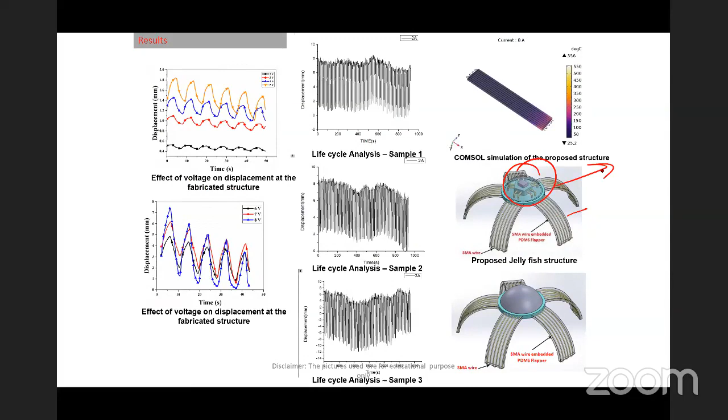And this was the onboard controller arrangement where we have made it. In fact, we also embedded a small sonar. This is one which we have submitted to DRDO, which is under the final stage of granting, so that we will be going for a technology transfer with DRDO, and further studies will be employed in it. So this was an onboard controller, and the entire testing capability was employed over here.

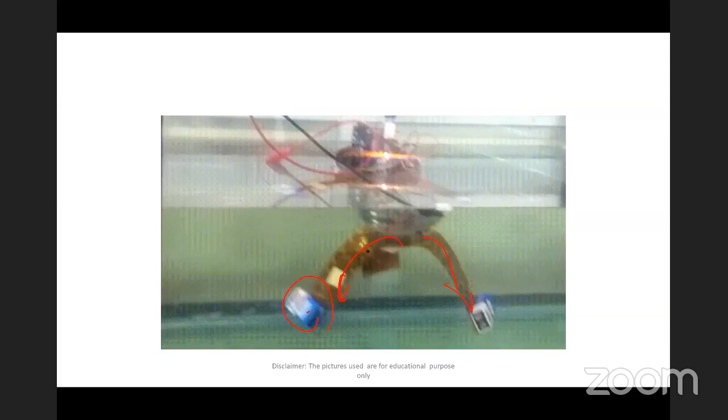So we went for an arrangement where we have embedded an SMA wire inside it, with an onboard controller, and we were trying to power this entire region from the battery. One important aspect is that we are also trying to maintain the buoyancy. This was an arrangement with power and onboard control, a tether arrangement, but we were thinking of using a micro SD card so that it will continuously monitor and come back so that you can record the data.

This was a complete biomimicking arrangement. We took a real jellyfish and took the different nodes of the displacement of the jellyfish motion, which was fed into this system. I'll show you how our jellyfish works. This is the real jellyfish, and this is our jellyfish which we developed in our lab. Whatever displacement characteristics were there, we have employed the same displacement characteristics here.

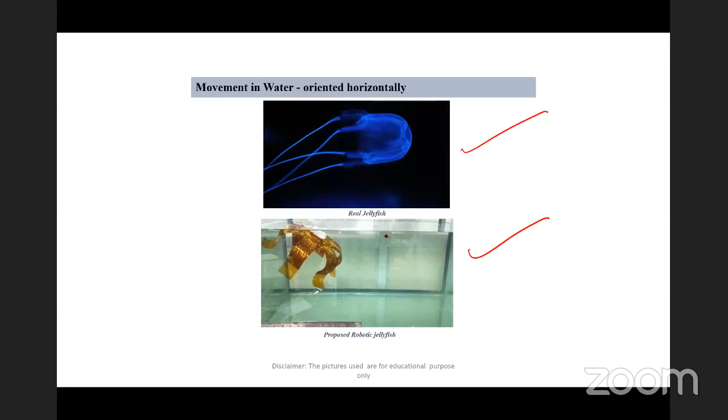So this was an interesting aspect with respect to the proposed jellyfish.

Before winding off my presentation, I would like to show a video presentation about the facilities in my lab and some of the projects which we have handled, so that it can open up some kind of collaborations.

These are some of the equipment which are available. We are specialized in laser processing as well as thin film. We have a flash evaporation unit, a DC sputtering unit, a pulse laser deposition unit, an E-beam evaporator, and some material characterization facilities such as the DSC and temperature-controlled UTM.

Since it's a mechatronic system, we also deal with pneumatic system designs. We also have wide varieties of 3D printers, and most of the components we manufacture on our own.

This is the metal additive 3D printer, and these are the different structures which we have fabricated with our metal additive 3D printers.

This is one unit which we developed in our lab at low cost. This entire unit was a Made in India concept. We got a MIG machine, and from the MIG machine we could make a complete machine tool, developed dedicatedly for shape memory alloy fabrication. If you want to make a thin structure or a thick structure, anything can be fabricated using this shape memory alloy setup.

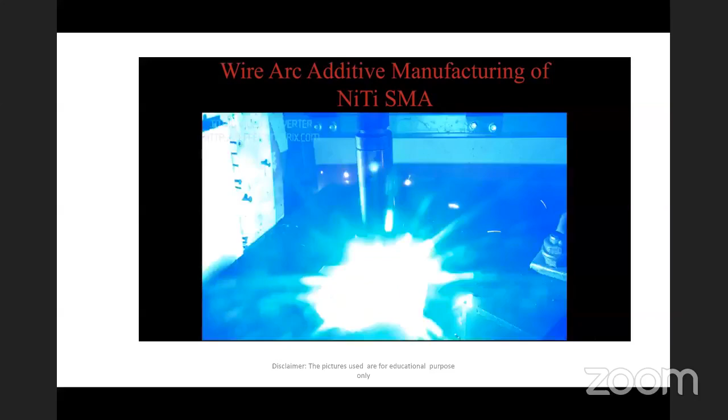This is slightly an old video. Currently, we have made our arrangement such that a laser is also being employed. If I want to make thin sections, I can make these thin sections using this. We have also made an arrangement to have an adjustable base, and we have made an arrangement so that you can have control over each and every layer.

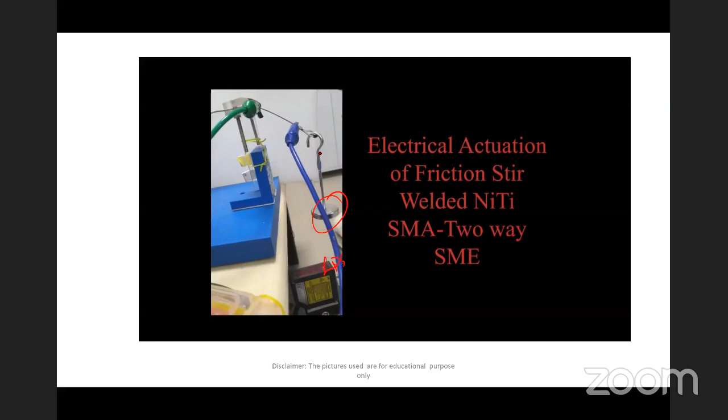This is one simulator which we have developed in our lab. These are completely 3D printed structures. Inside this, you have the capability to apply load, and this is the laser displacement sensor, so you can monitor continuously. If I want to study the failure mechanism, this would be highly helpful for me, so that throughout the day I can just monitor the failure.

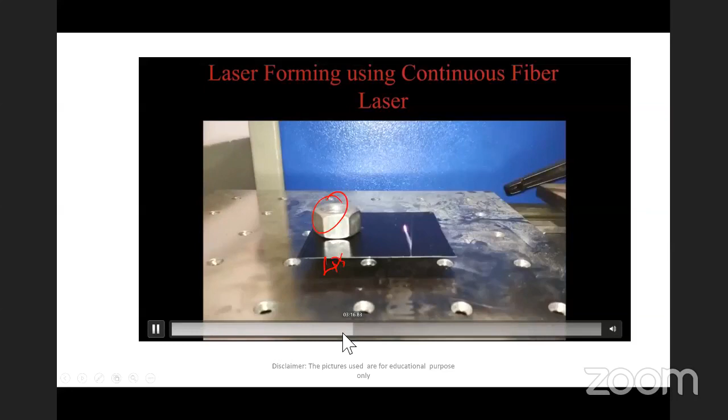This is a laser forming technique. This is how an SMA actuation works, and this is laser actuation. This is a laser forming technique which we have employed in our lab. The main idea of this laser forming is it's called die-less manufacturing, where without any die you can just bend your sheets.

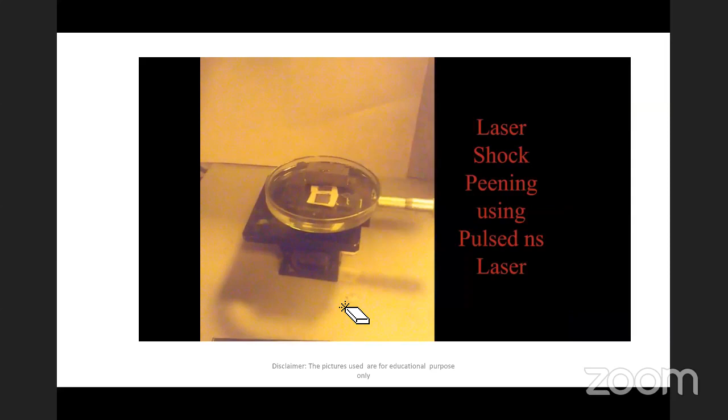We are a consultant for John Deere, and we are also a consultant for GE. With GE, we make die-less aerofoils with this laser forming technique using shape memory alloy bending. With John Deere, we are trying to make some kind of engine cabinets. This is laser shock peening which we are doing for WABCO India Limited, for improving its behavior. This is one shape memory alloy composite structure which we have discussed in our presentation, and this is one of our DRDO projects for controlling missile orientation.

This is a shape memory alloy Johnson's heat engine, which we have developed in our lab. The only thing you require is hot water, and with that hot water, you can create some kind of energy.

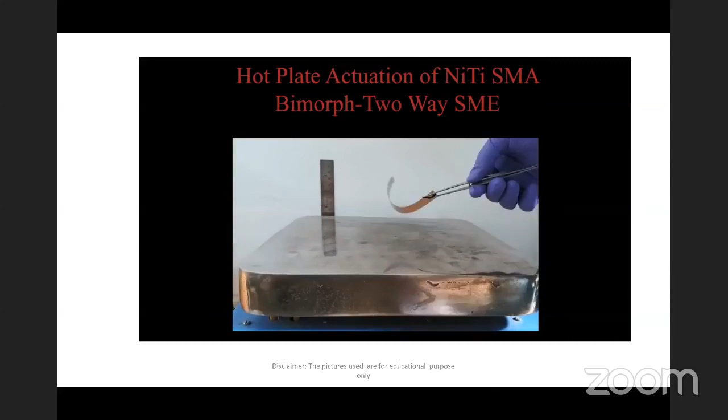This is a shape memory alloy BIMORPH demonstration. This is a slightly closer view, where you have a plate, and by just heating it, it gets flattened up, and when you try to remove it, it comes back.

The interesting part in this, on an Indian context, is that we are the first to fabricate this BIMORPH, and most important, we have the capability to fabricate this BIMORPH even up to 1 meter by 1 meter edge. If anyone wants this BIMORPH, I am ready to give it free of cost for some kind of applications.

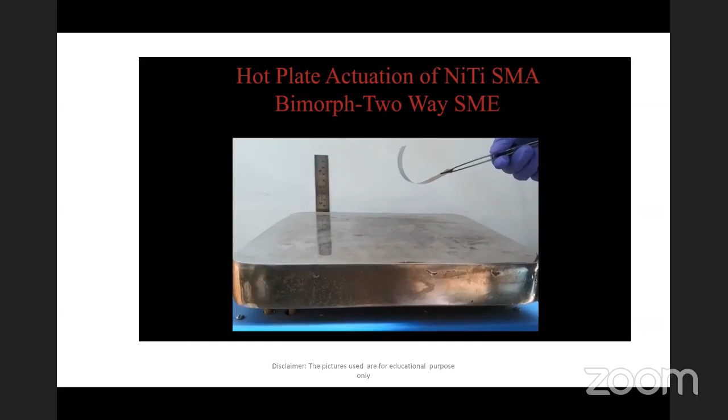And this is an interesting thing. Basically, we are also into piezoelectric structures. Piezoelectric, we all know, when we apply a load, it gives a certain amount of power. So we are making some kind of lead-free piezoelectric using a simple solution technique, and for this we go for zinc oxide.

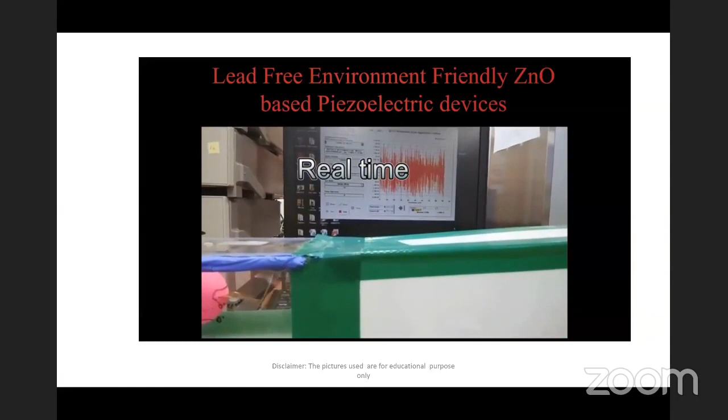This is a fluttering-based device which we have developed. Basically, it is a piezoelectric, and with respect to air, it behaves something like a flag. The more the flag flutters, the more energy is created from it. So we made a piezoelectric structure which we kept inside a wind tunnel experimental setup, and in this setup, we were trying to tap the energy throughout.

This is one machine tool harvesting unit. We have kept a piezoelectric in a compressor, so when the compressor vibrates, we can tap the energy. In fact, this is the kind of system where, like in a lathe, you can just embed these piezoelectric structures, so whenever it vibrates, it can harvest energy. These are some of the machine tool sustainability applications we have employed.

With this, I would like to close my presentation. This is my email ID, so for any kind of help or collaborations, I'm here to work upon.